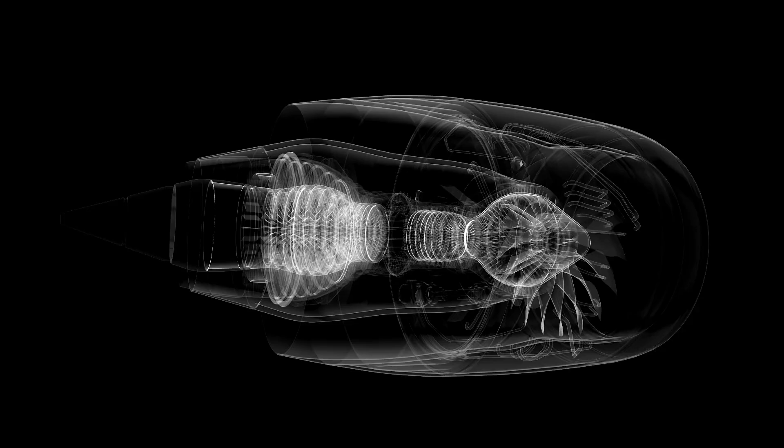If you think about it, any substantial innovation that helps our lives get better has an engineer. So I'm obnoxiously proud of our profession of manufacturing, innovation, and research.

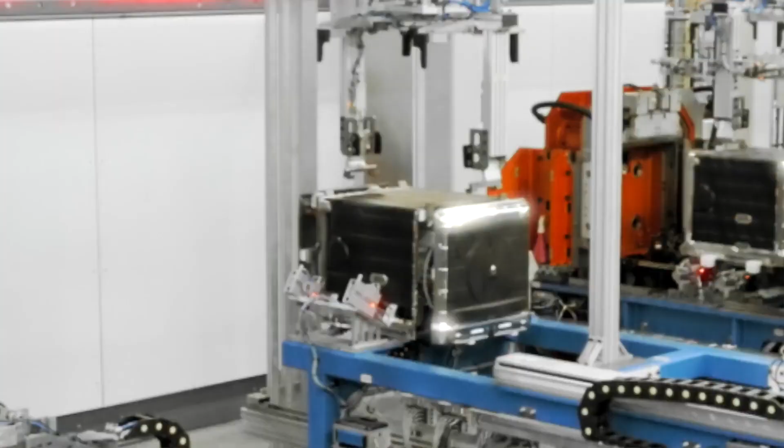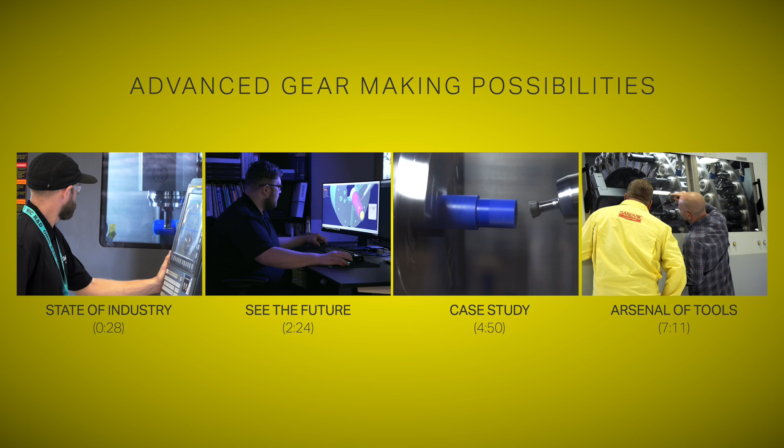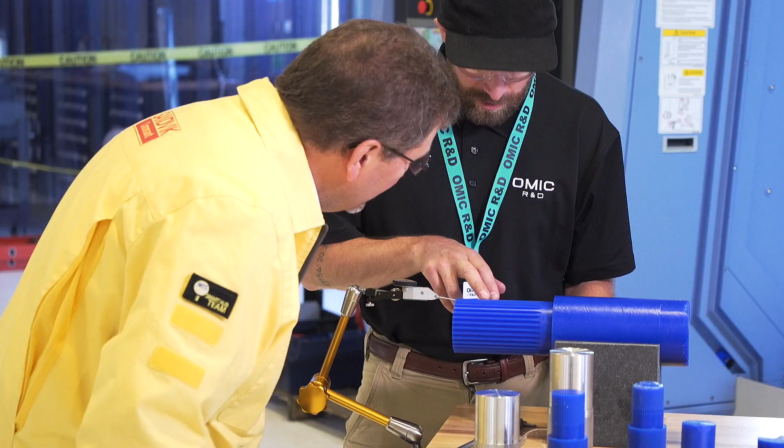The common theme from automotive to aerospace to agriculture is do it faster, do it cheaper, do it at an even higher quality with tighter tolerances. The dominant solution is collaboration. In order to move to the next level of manufacturing and what's possible out there, we can't do it by ourselves.

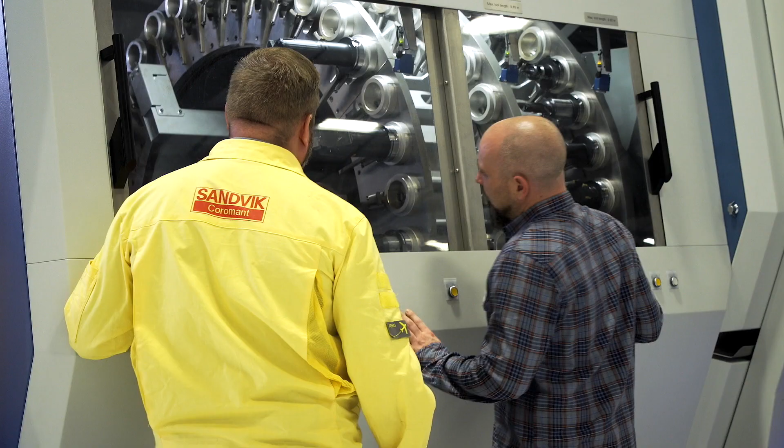A very conscious decision was made to reach out and start working with universities and institutes, machine tool builders, cutting tool companies, for not only collaborating, but the future of where industry is going. It's getting pushed further and further, continuously evolving.

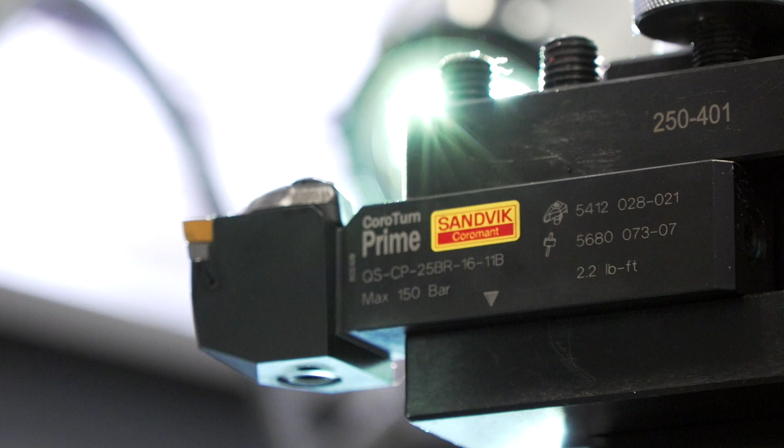A new method of manufacturing a part that you can eventually condense into 1/10 of the size of your shop, and then tenfold your output.

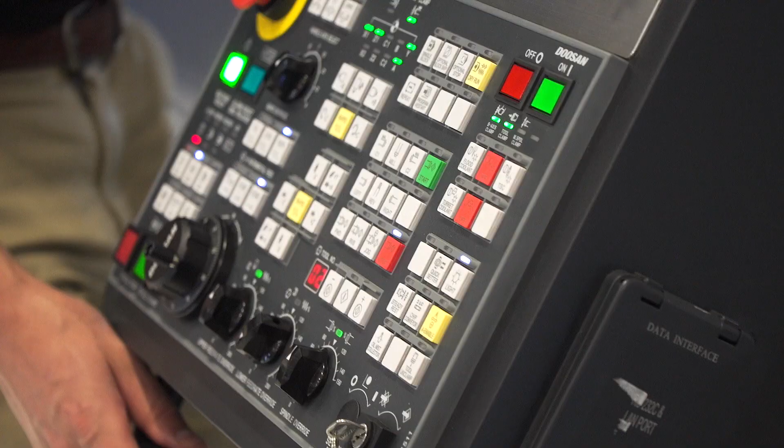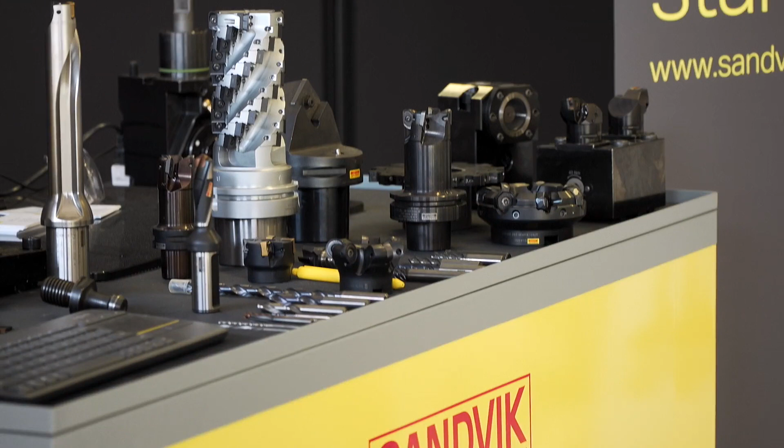With this swift change in manufacturability in the industry today, OMIC sets itself apart because it pairs with the world's largest manufacturing companies. We have Sandvik Coromant monitoring every single aspect of what a machine's doing. It really provides a great test bed for industry to mix in with our global partners to develop something that's not only critical, but is necessary.

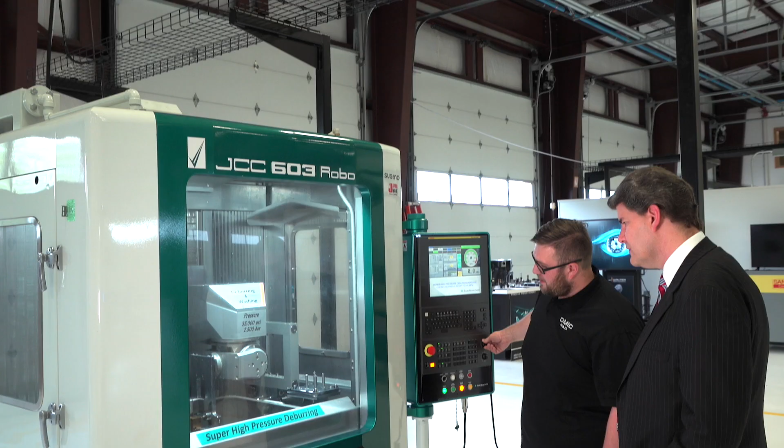One of the things that is unique about what Sandvik Coromant brings here to OMIC R&D is their willingness to set aside whether they have a competitor in the room or not. They look at this as solving industry's problems, finding a way that their customers are going to benefit by benefiting the industry as a whole.

A place like OMIC R&D brings all the knowledge and experience of our university partners and our manufacturing partners together here in Scappoose, Oregon, under one roof, to overcome problems that alone they could never do.

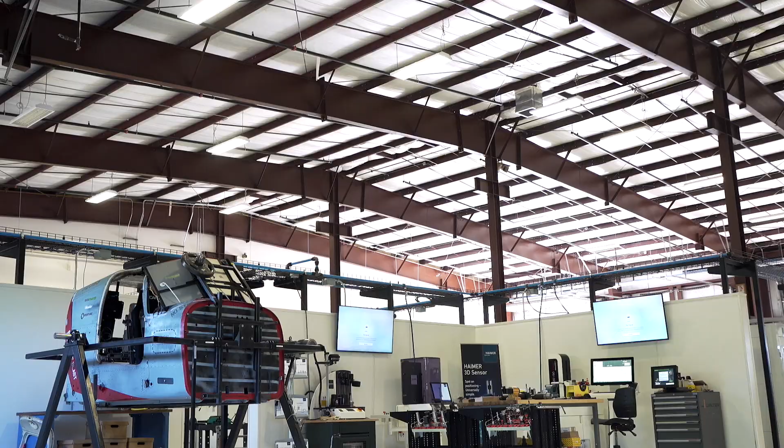We are extremely focused on value-added research for production. You can optimize, you can test, you can change parameters. Build your confidence with data-driven decisions.

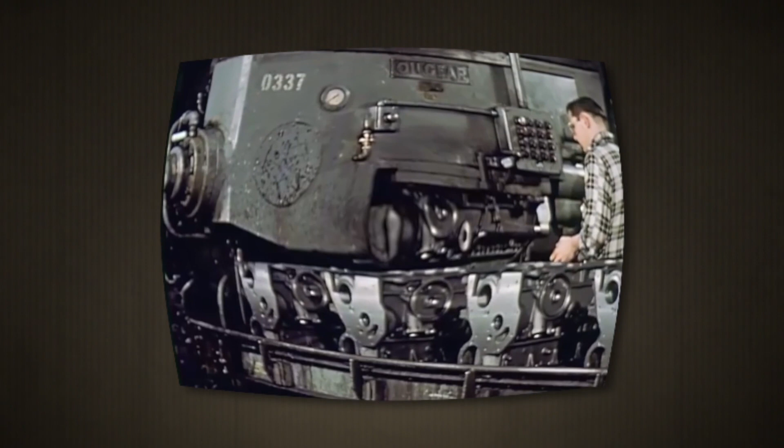Cost-conscious manufacturers in all industries are alert to opportunities for savings through automation. Back in the old days, manufacturing was these specific lines. Each machine had its own single task. And at the end of this line, you would have a product, a finished product.

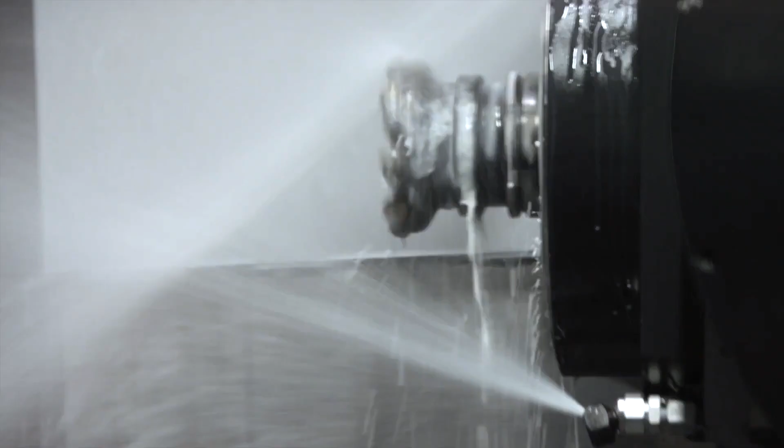These large assembly lines, and you're condensing them into something the footprint of a car. So today's machines, we're using one-shot approach where they can do turning, milling, gear milling, boring, drilling. One machine and the part comes off in one complete setup, which ensures precision.

You control all those variables now from multiple handlings, multiple fixturing. The process is much smoother and much quicker.

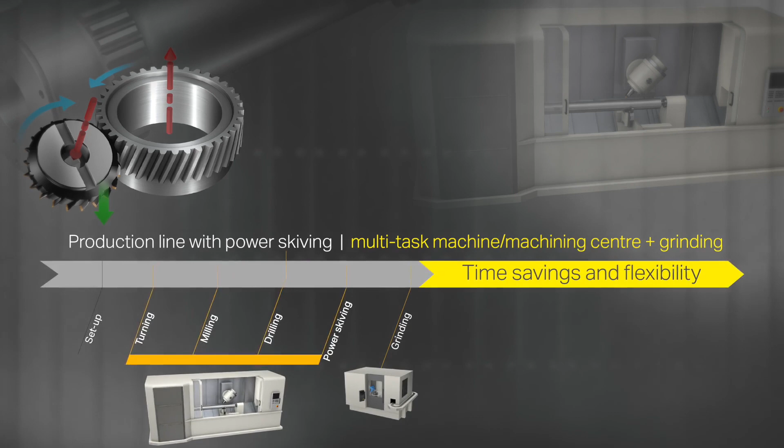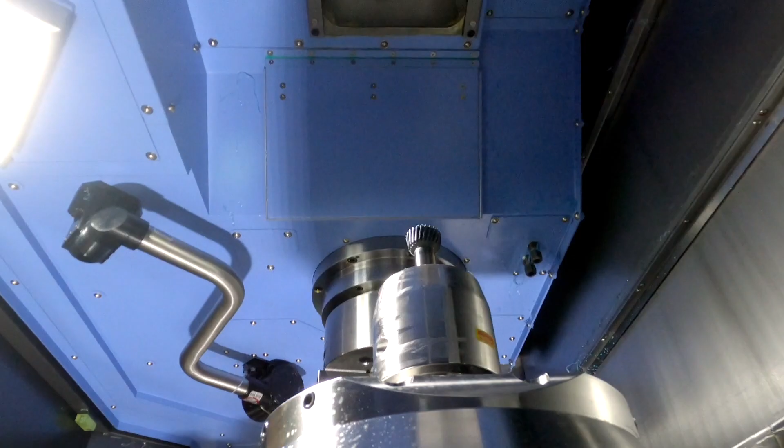You have to look at that machine tool and go, okay, I have 9 axes here. I'm not really limited to what we did in the past. Where multitask, it's endless. If you fixture the part properly, it allows you to get at every surface needed.

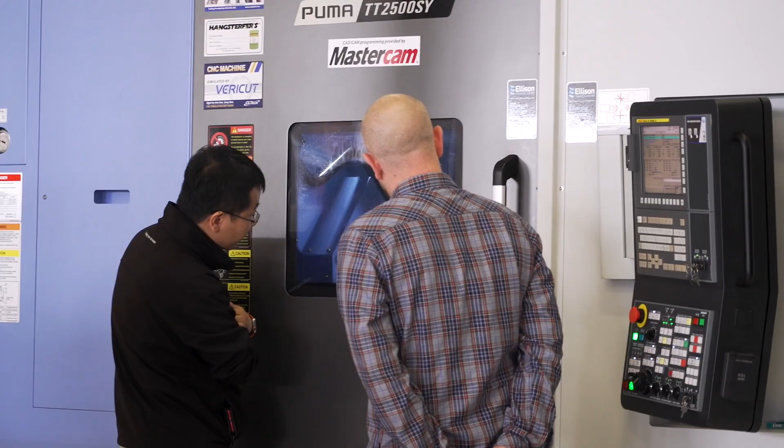Truly, seeing is believing. You can't argue with the data once you've seen it done and it's right there in front of you. Having OMIC here in our backyard to actually show them this is what's possible. So the partnership with OMIC is invaluable.

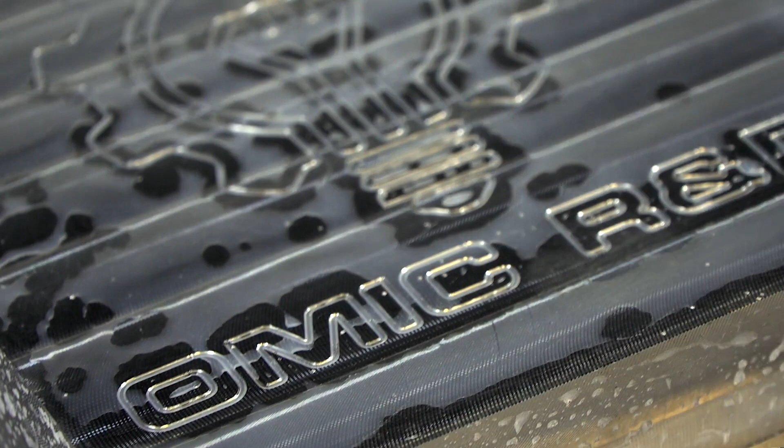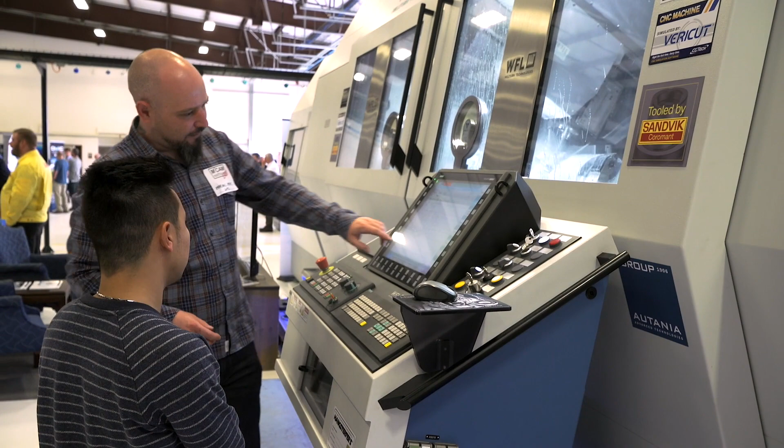Through the strength of this collaboration, the extremely strong handshakes we have with companies such as Sandvik, we're able to have tools, instruments, machinery that are closely aligned to industry as possible. The machines you see in this place are the ones you'll see in production at aerospace, automotive, gear manufacturers.

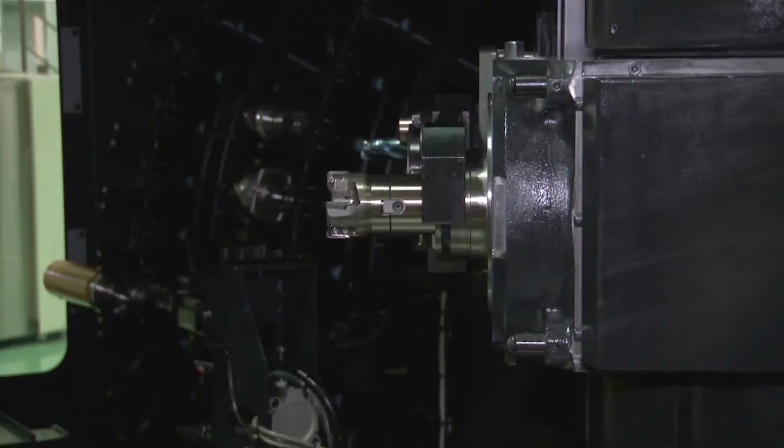Is a pretty rare combination. The cutting tool manufacturers and machine tool manufacturers have brought a lot of tech into this. Some of the latest software, some of the latest materials and sensors.

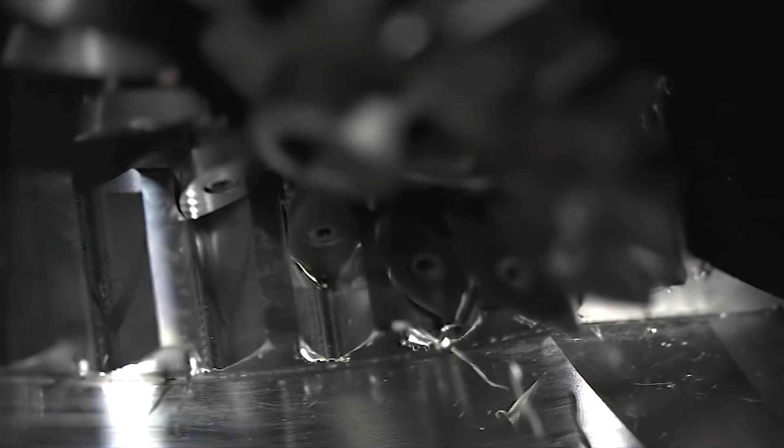These machines can tell us when cutting tools are breaking, which cutting tools go with which jobs. It's horsepower, it's torque, it's vibration. You see it all laid out right in front of you. That's where I got started in this kind of modern age of integration.

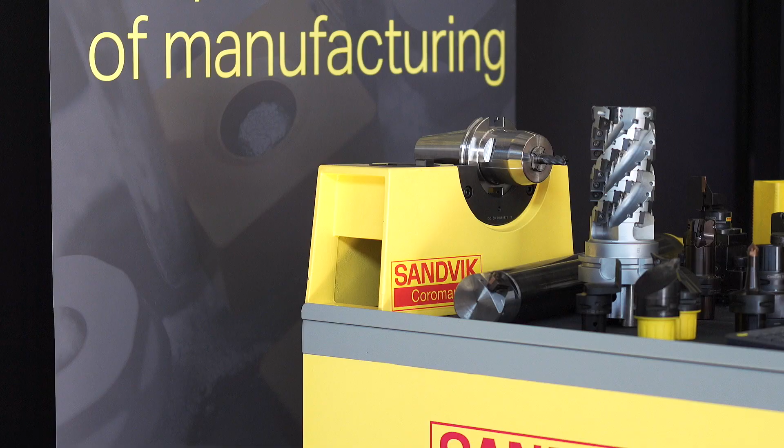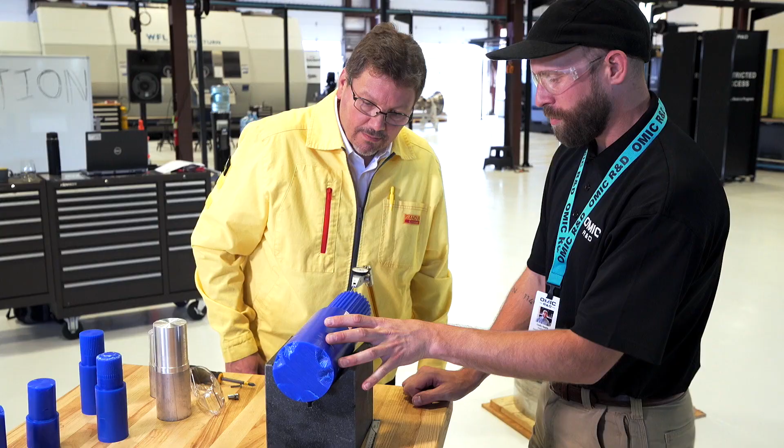Sandvik Coromant really understands how to approach a place like OMIC R&D. They're actively engaged all the time, on a weekly basis, sometimes on a daily basis. They're rolling up their sleeves and finding solutions that may not even apply to a research project that they're directly working on. That's just the kind of spirit that Sandvik Coromant brings to this place, pushing them along with us to do things better, more streamlined, and more precise.

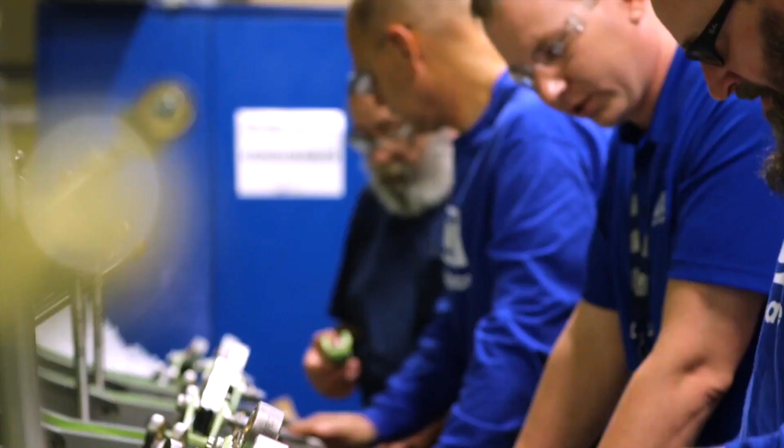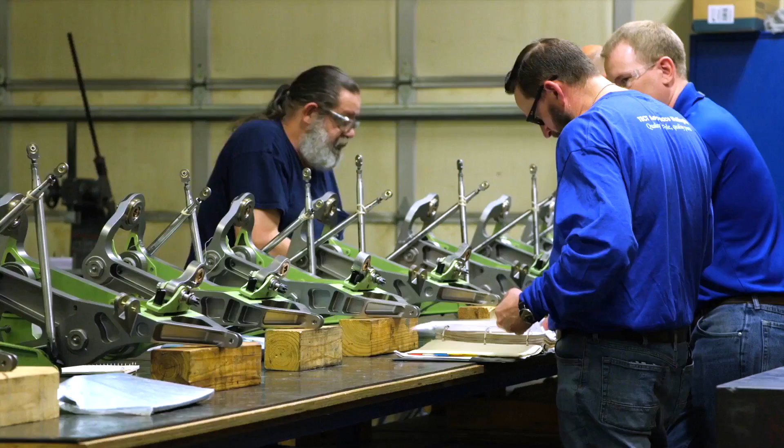Where we are at TECT Aerospace in Everett, this is our core competency: being able to provide flight-critical mechanical and structural assemblies. We machine both soft and hard metals here, up to 5-axis milling and 9-axis mill turning. There's no way we could be competitive in the future continuing to build these types of parts in a conventional way.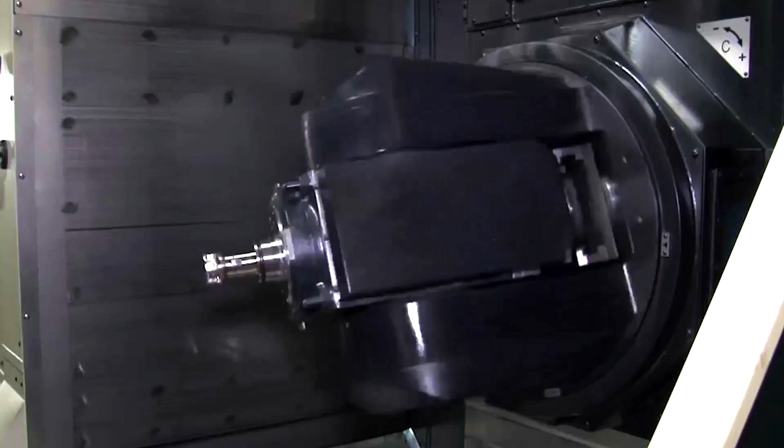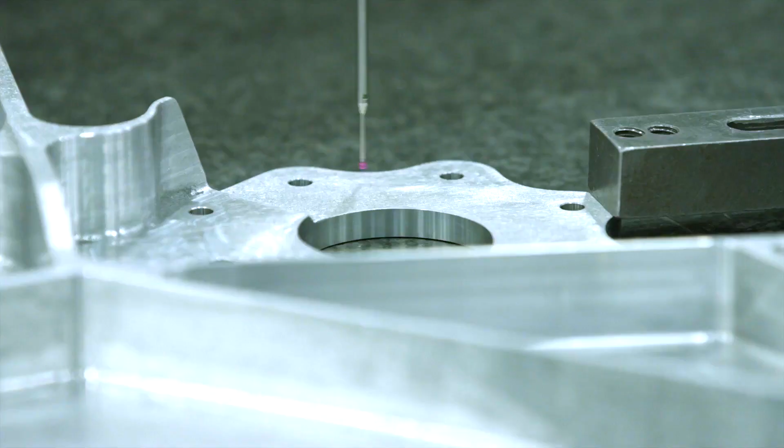We've got to be able to better utilize the equipment we've already invested in. Now that we have the techniques and we're working with Sandvik to bring that technology in, it really ensures our future. They could vertically integrate that technology back in-house, ultimately never paying a supplier to make it again. Millions in long-term revenue. Power skiving is about 24 times more productive.

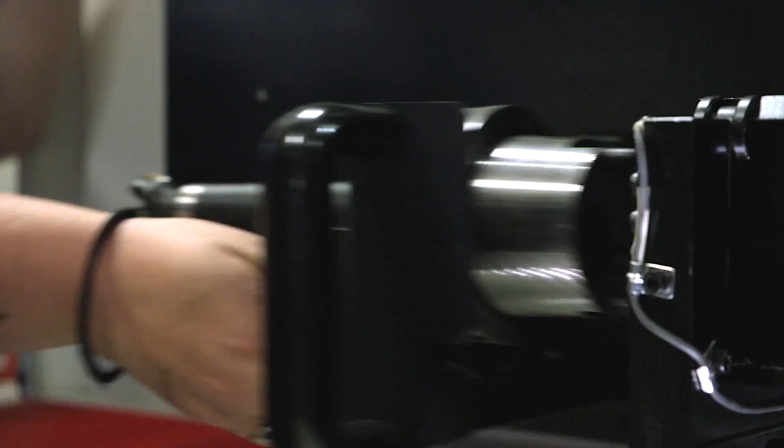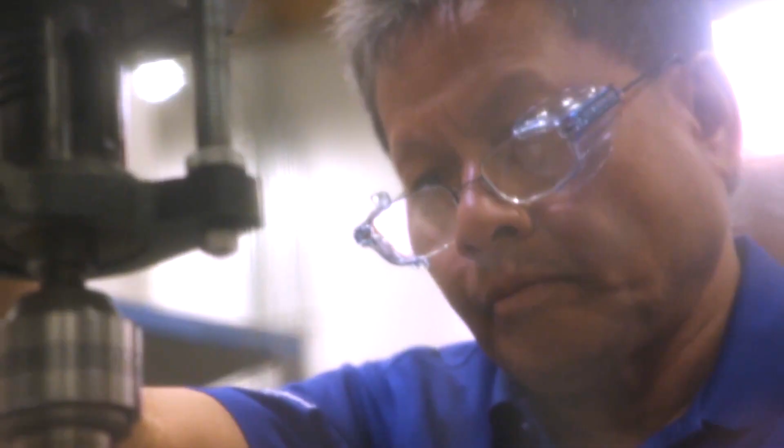As manufacturing sites try to transfer over to this style of manufacturing, it's completely uprooting their mentality on how their parts are being made. As a lot of legacy companies, we have a lot of older equipment that have been building the parts the same way for years, if not decades. And to be cost competitive in the market, we had to make this change.

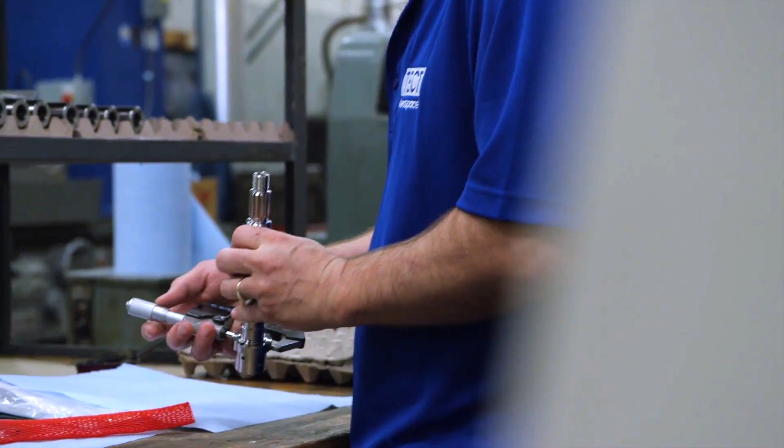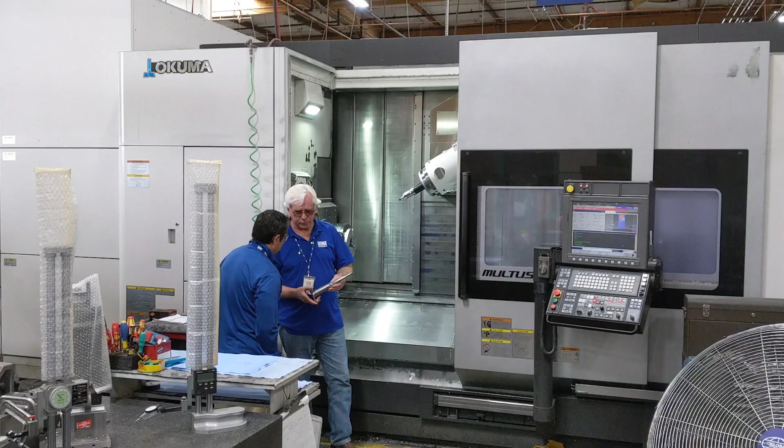We wanted a world-class partner to help us move forward with this technology. It's exciting to be able to bring something to them no one else has by delivering high quality components, high quality tooling, the service level, the technical skills required. Not only are you bringing them new technology, you're also putting more money in their pocket.

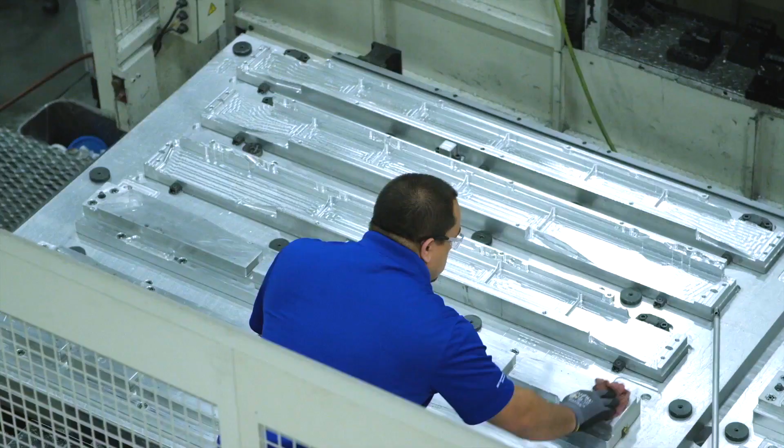Our end goal for every single customer is to bring them value. I believe we are the first in the Northwest to implement power skiving on mill turns, which is very exciting for us. It's actually a big morale boost also for our facility, and that gets the facility excited about our future, and it actually enables our future.

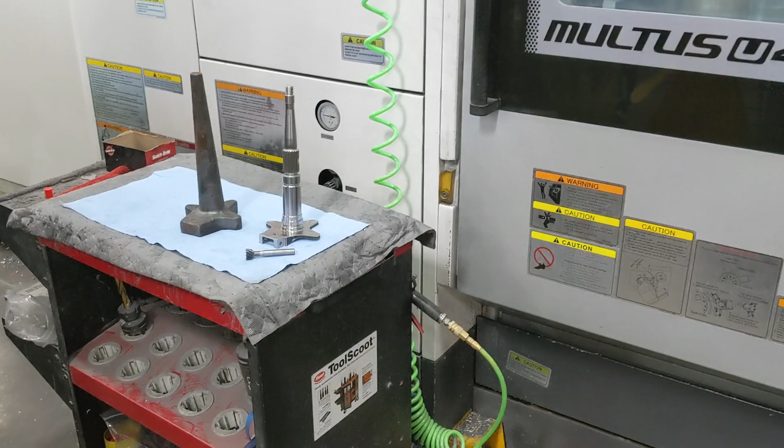As everyone knows, customers' biggest concerns are cost and lead time. What we're doing here with our one and done philosophy is a huge savings for both. Our engineering services, our programming services, we can be part of every step of the way so we know which cutting tool is going to be the most productive for them.

The story and the success with Sandvik Coromant and Tech Aerospace, we're really proud of.

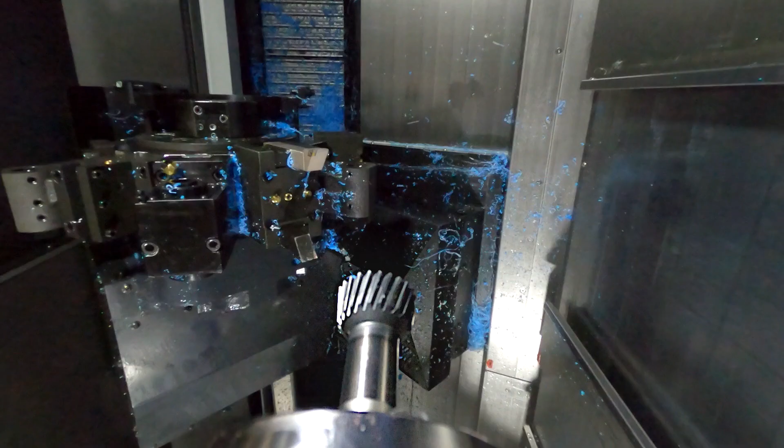We want our customers to rely on us as that technical service. Whether you want to go down the path of power skiving or maybe using your current machine tools that you have on your floor today, we have products that will suit your needs and get the job done for you.

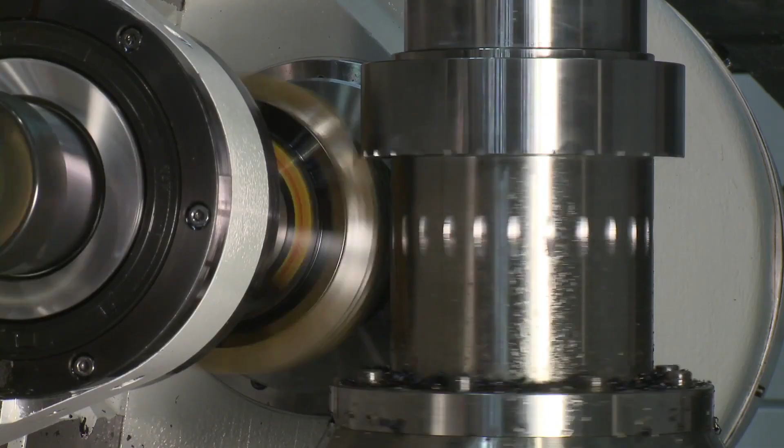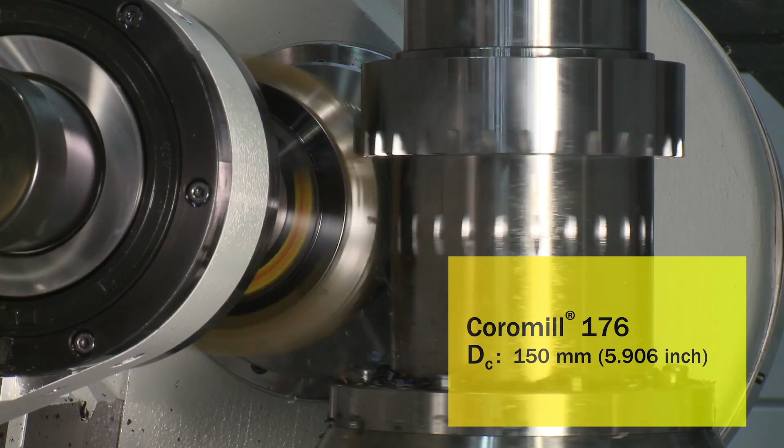So we have the CoroMill 176. It's an indexable hob, an alternative to a solid carbide hob or a high-speed steel hob. You're just changing out inserts, right? And the inserts are lower cost overall when you fully implement the tool.

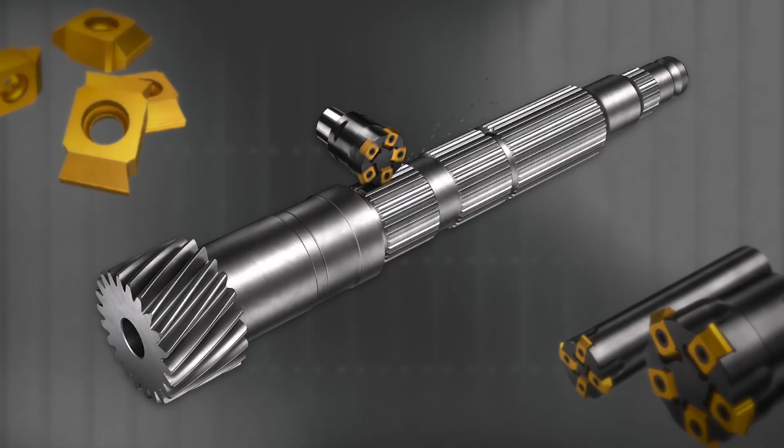Other products include the CoroMill 171.4. It can go on pretty much any vertical machine with a 4th axis to allow you to index to the next tooth. So you can have one cutter body and 10 or 12 different insert shapes to accommodate 12 different components.

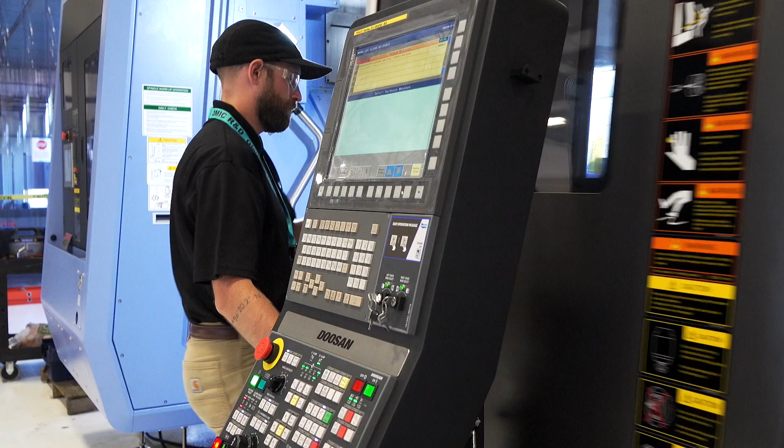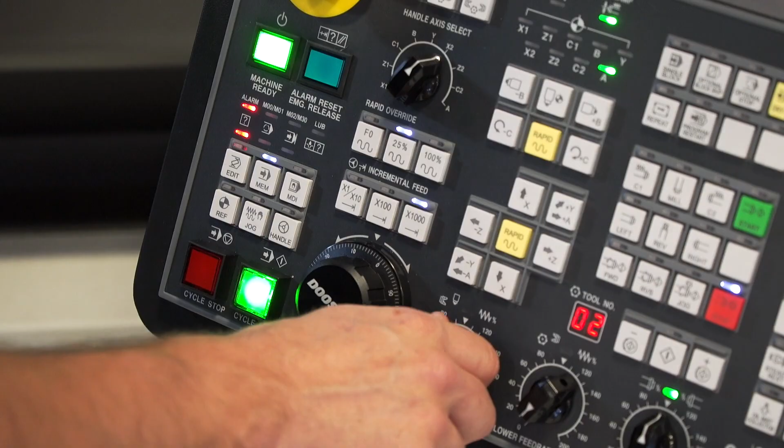As manufacturing experts, we can tweak feeds, speeds, and engagements to try to make tools run better. But if they already run great at high productivity rates, that makes our job easy. It's the materials you make them out of - Sandvik Coromant has some of the best grades of cutting materials out there, and they have for years and years and years.

It's like taking a piece of the puzzle out of the equation when it comes to problem solving. You never have to question it.

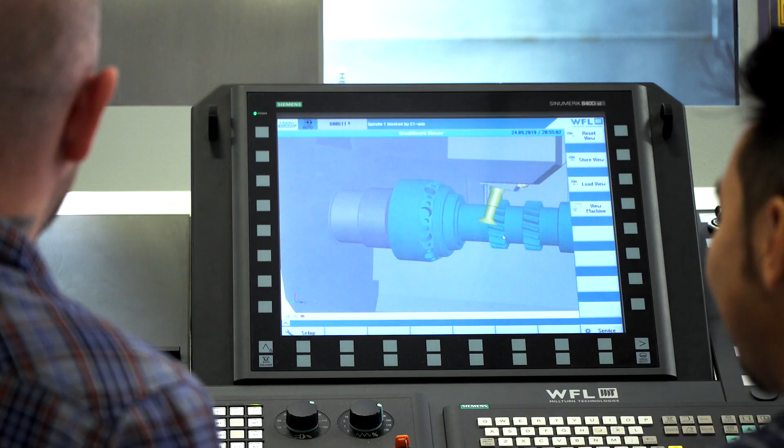As you have that constant pressure to produce parts faster in one shot, power skiving and other gear cutting like the Coromant 171.4 gives you the ability to explore different industry segments and always be in front of the competition.

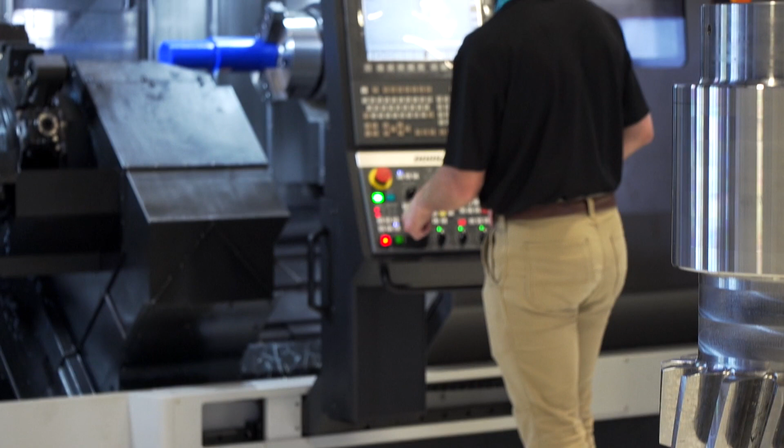Most companies can't focus on R&D exclusively - their job is to produce things. They can see the cutting tools and techniques in operation to help them decide, is that the right thing for me? Is that something I should be investing in? You can carry over a massive chunk of research from an R&D center into a real-life production environment.

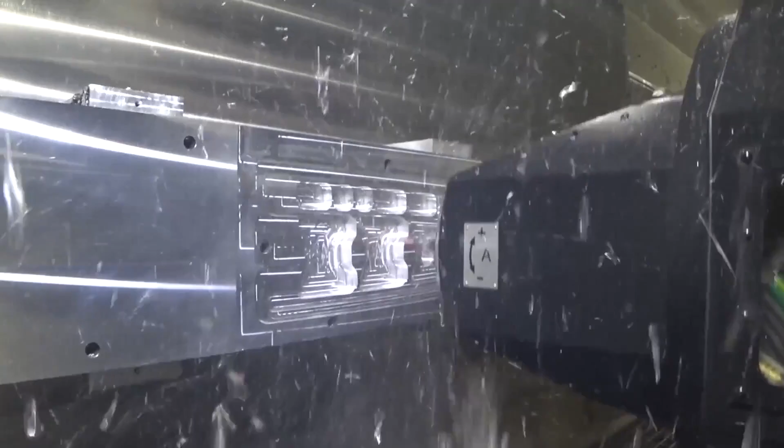I'm just extremely excited that we can connect so many dots in partnering up with companies such as Sandvik and creating data-driven decisions for the industry, for the community.